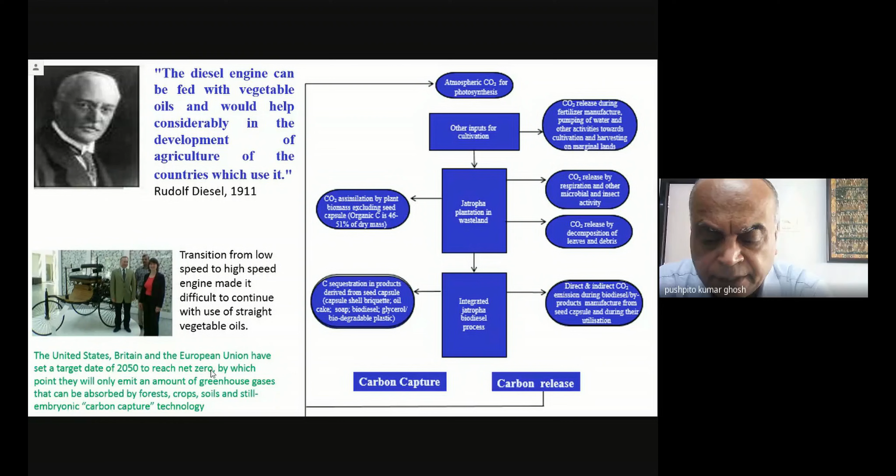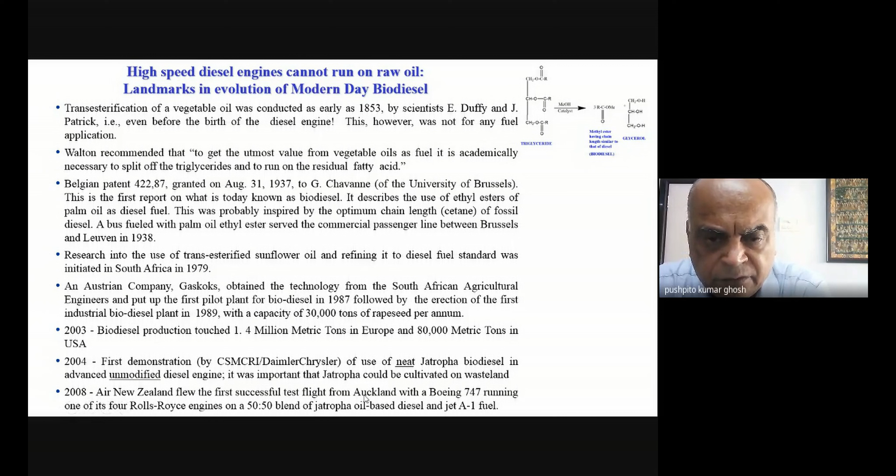Now, as I told you, the biggest interest was that we were trying to grow all kinds of potentially commercially important plants in very difficult to cultivate lands, what we call barren lands or wasteland.

This is what really attracted the attention of the world. In fact, I'll send you an article published in Nature by this person, effectively centered around all of this work.

Now, before I come to this - I've not taken the whole film, just a snippet from it. It was made by the German television channel ZDF. People from Germany had come and filmed this work of ours. I'll play it now, it's just about 2-3 minutes, and later on I'll describe some of these things.

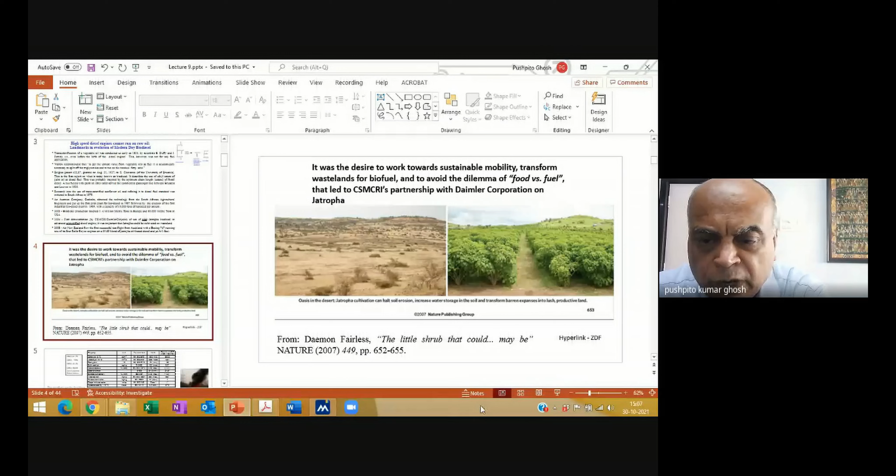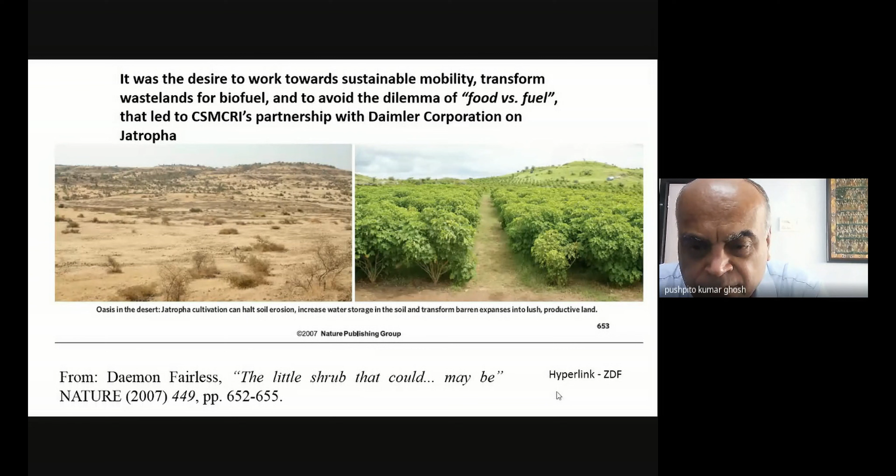You would have gotten some idea about how exactly this works. I wanted to cover all the way from how the plants look, how they grow, the fruits, the seeds, and how biodiesel is made, and how it was running a bus on 100% biodiesel - just so you can see the entire chain of how this is all done. Later on, I'll describe the individual steps in more detail. Is it clear to everyone? Are you able to see everything?

Now, I told you it runs on 100% biodiesel, but actually there was a very stringent specification for the fuel which we had to comply with, because until we achieved this, nobody would put it in their car. Mercedes would not put it in their cars unless we had been able to achieve this minimum specification. This is what the actual results were, and what was important was that in almost everything, not only did it match the specifications, but it far exceeded them.

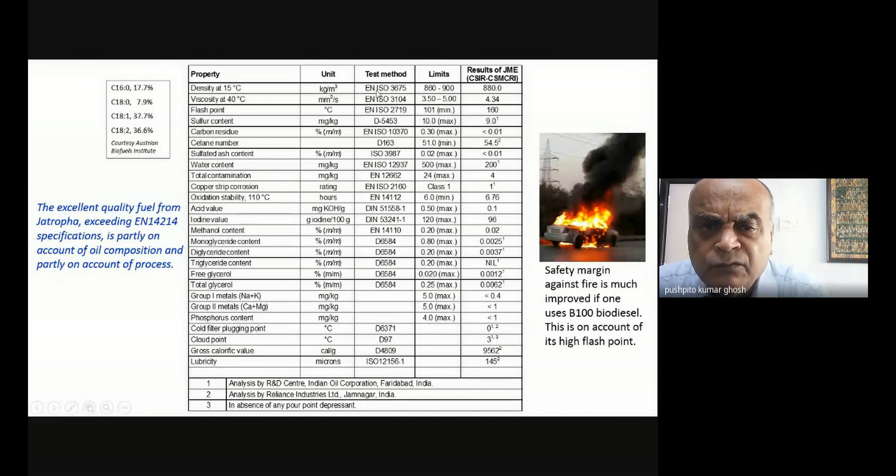It was because of that they had the confidence of trying this historic run with neat biodiesel without modifying the engine. Another interesting thing nobody talks about: this particular fuel has a flash point of about 160 degrees centigrade, so it cannot accidentally catch fire. In fact, when people were trying to get a license from the Petroleum and Fuels Act, they said it falls outside the Act because its flashpoint is so high. So this neat running showed that accidental fire would be almost negligible in this kind of situation.

All of this analysis, most of it except for a few, were generated in Germany by Mercedes-Benz. We did not have the capability of really generating any of this ourselves.

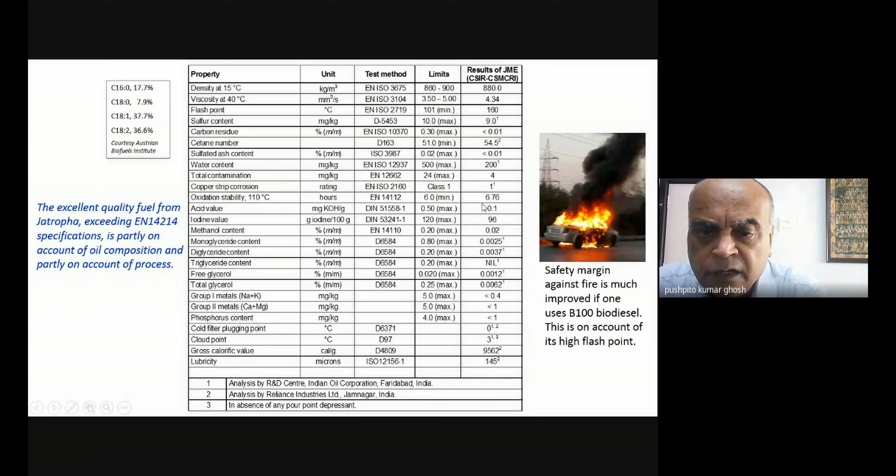Before this was put into a vehicle, a lot of test runs were done on test engines. That was done in Pune by Daimler Chrysler India and the Automobile Research Association of India, also in Pune. They tested both for fuel consumption in their engines, and also looked at all the emissions: CO, hydrocarbon, NOx, particulates, CO2 - all of this was actually looked at.

This methyl ester that I told you about, you can actually esterify using either a base catalysis or an acid catalysis. Both kinds were done, and both products actually passed the test - they were very good, no problem. But finally, the base catalysis was chosen because it was a bit simpler to carry out - it could be done at room temperature, and there were a few other advantages. So effectively, biodiesel based on this catalysis was selected.

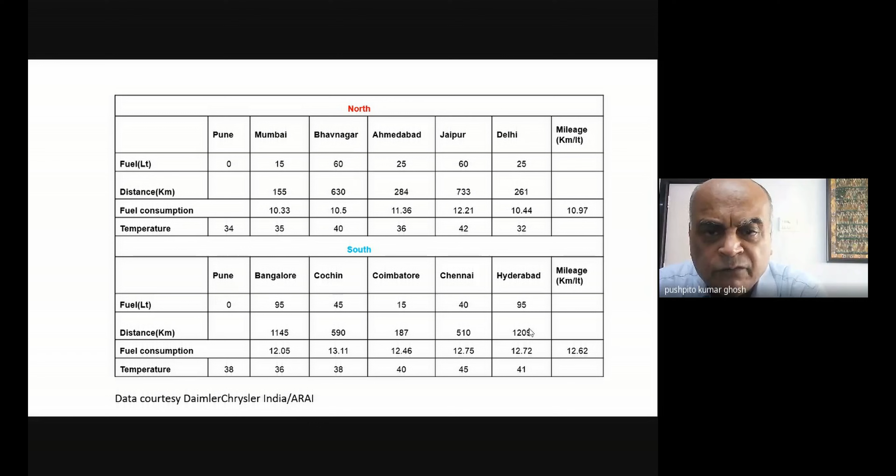They got even more daring, and the next year, 2005, they did something unbelievable - they went to Leh, the highest motorable road in the world, at something like 18,400 feet. They took three Mercedes-Benz cars to Leh, and I was also there. The vehicles, even in that rarefied atmosphere, actually ran well, and we have an understanding of why they ran so well.

All the emission data etc. was generated, and basically, I think at that time the specification of fuel was Euro 3, EU3. It far exceeded EU3 specifications.

Then I told you about Austria, because Austria had the best biodiesel institute in the world. The Austrians actually did another study where they compared this Jatropha biodiesel with biodiesel from Europe and other parts of the world, and effectively, it came out right on top.

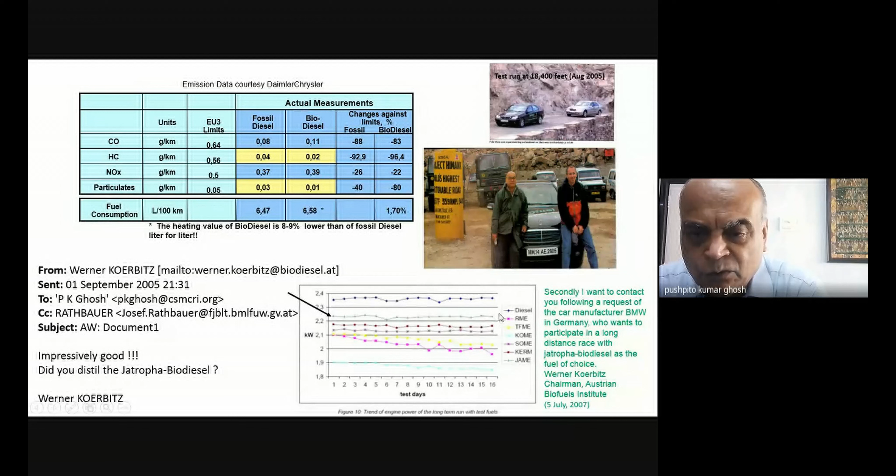It was from Paris to Dakar in Africa, 5,000 kilometers. I think it finally never happened, this race, but it was all set to run.

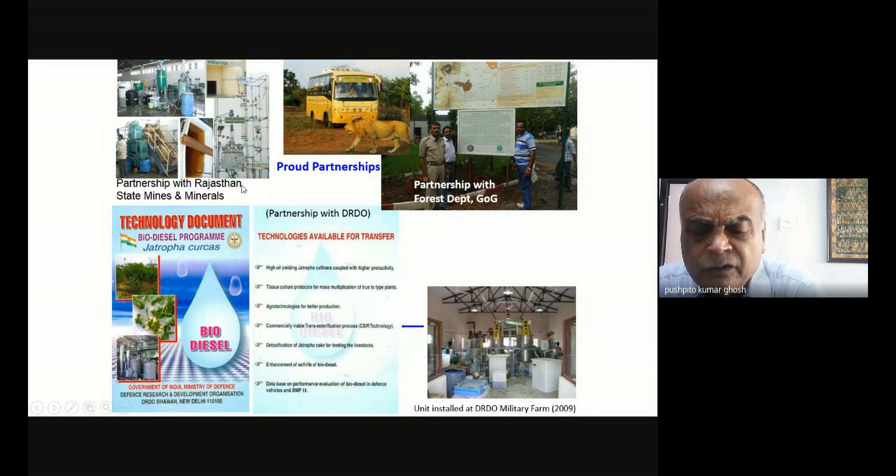Similarly, this is basically what was running all the vehicles in our country on biodiesel, starting from the buses in Gir Forest, DRDO, all the military vehicles—they had licensed the technology from us, and another company in Rajasthan State Mines and Minerals. So it became a very interesting technology.

In fact, there was this sheikh, the crown prince of one of the Emirates, Ras al-Khaimah. He came all the way to our institute because he had heard so much about it, and actually witnessed everything, how it works, and things like that.

So obviously this is all over the world—all these Mercedes-Benz cars running on this stuff and things. So what is important is...

It looks like a surprisingly simple technology. You can imagine there's an oil, and you need some methanol for the transesterification, and there's a base catalyst like KOH or some catalyst like that. Then you are forming the methyl ester. But it looks so simple, yet most people could not get it right. I'll tell you what were some of the complexities. Sometimes don't get fooled by these simple equations—when you actually go to do something, you'll realize how difficult a seemingly simple problem can be, such that the whole world is trying to do it and they can't.

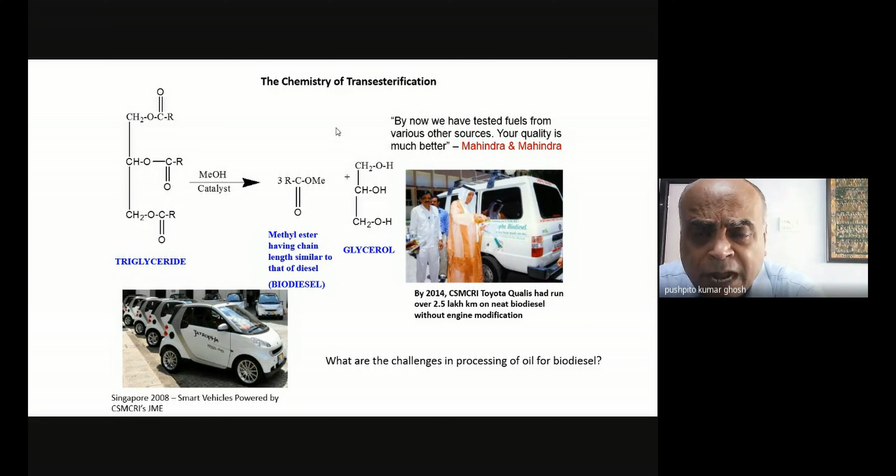Now, just to show you that biodiesel, if we could actually grow and run vehicles on it, would be unbelievable. This vehicle's engine was opened up after about 163,000 kilometers of running on 100% biodiesel.

These Toyota mechanics were absolutely amazed because the engine looked almost like new. Finally, of course, it covered about 2.5 lakh kilometers—I think at that point the car became too old, but the engine was almost like new.

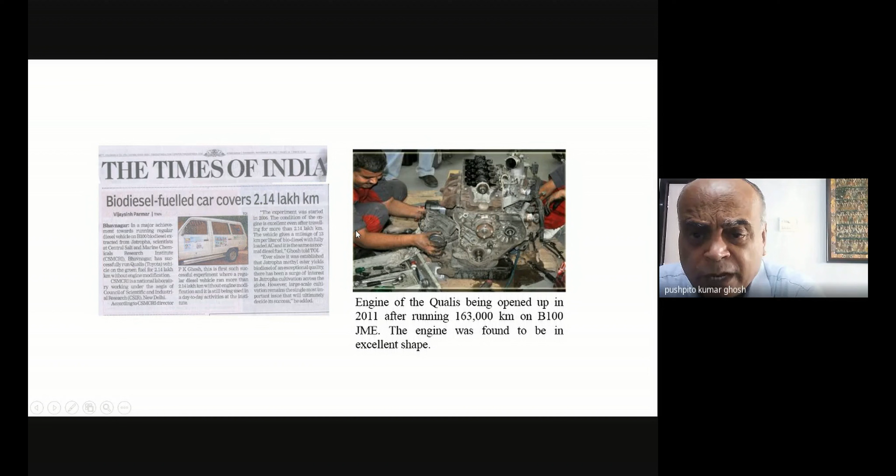Now, it's not just about running vehicles—you can run stationary engines also with this. In fact, at one time, all these stationary engines from our country were getting exported a lot on the back of this performance. It was an outstanding performance, and you could even run very big vehicles like earth moving equipment. Everything worked fine.

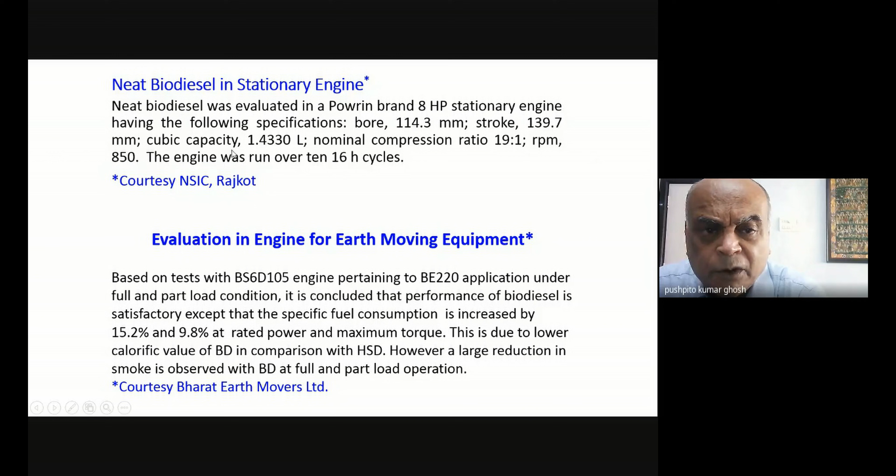So obviously, all of this—I'm not sure about this, but all of this was 100% biodiesel. Now, it's not only that one was using Jatropha oil.

Because that's also good, since if you keep frying in the same oil, it's not good for your health. So if you have a good outlet, you use it for frying as long as you want, so that the oil doesn't get too bad—and after that, just convert it into biodiesel.

So this could be a huge resource. They were of course not very sure about how much waste oil they have, so they wrote that we don't generate much waste oil and will work with our suppliers of oil to determine their wastage—if quantities are interesting, we will champion implementation. So obviously, this is something that had captivated people across the board.

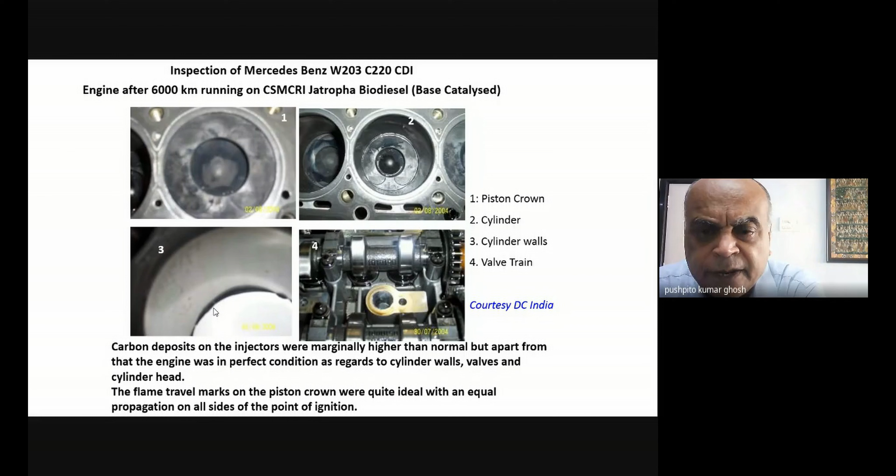Then the oil you got from that - a bit of the method of manufacturing biodiesel was shown, but I'll tell you more details. And then the cake you get from the oil after pressing is an excellent manure, so you can just put it back into the field. Ideally, one should do this part of the operation within the field itself - maybe 300 to 500 hectares of cultivation, and around there you put up one oil mill, so you're not transporting things over long distances.

Also, it was found that when you keep the seeds stored inside the capsule - meaning you don't take them out until you're actually ready to use them - the oil has much less free fatty acid, and it's a much better quality oil.

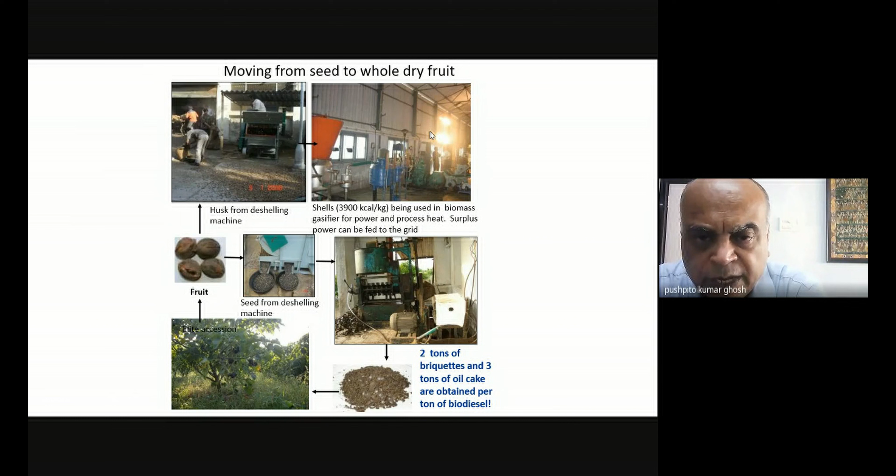Now, the cake I showed you has been used not just for Jatropha but for many other crops, and it grows very well. These are trials on cotton and bajra, done by professional people at very large scale - not very small scale experiments.

Now let me come to the making of the biodiesel. So you saw how the oil was expelled from the seed. Now, some very important things - any oil will have some amount of free fatty acid, and this is very detrimental in biodiesel. Secondly, if these are present in the final biodiesel and you can't remove it, it can really cause havoc in the engine.

In the actual oil you get, here it's 2.6%, but when we finally look at the free fatty acid in the biodiesel, it's just about 0.29% - so almost 90% of it has got removed. That's the first thing one needs to do. One thing I should have mentioned - there are two reasons why the Jatropha biodiesel particularly worked so well. One is that we had a very good technology which we had developed, which I'll describe to you now.

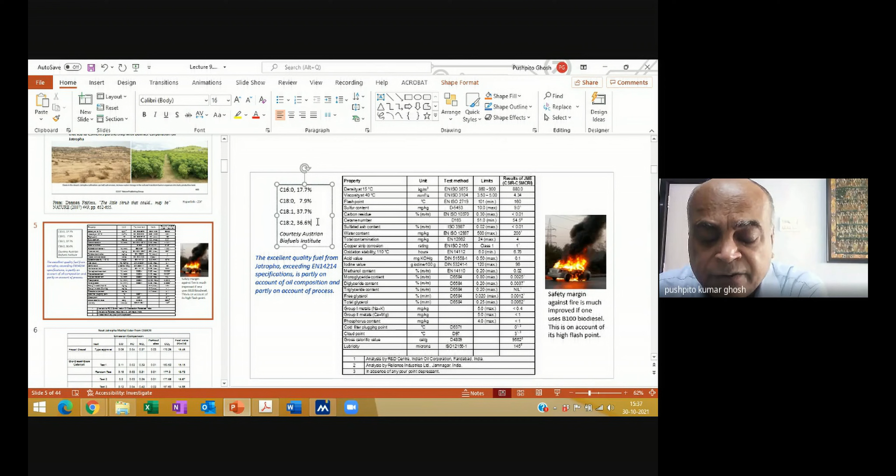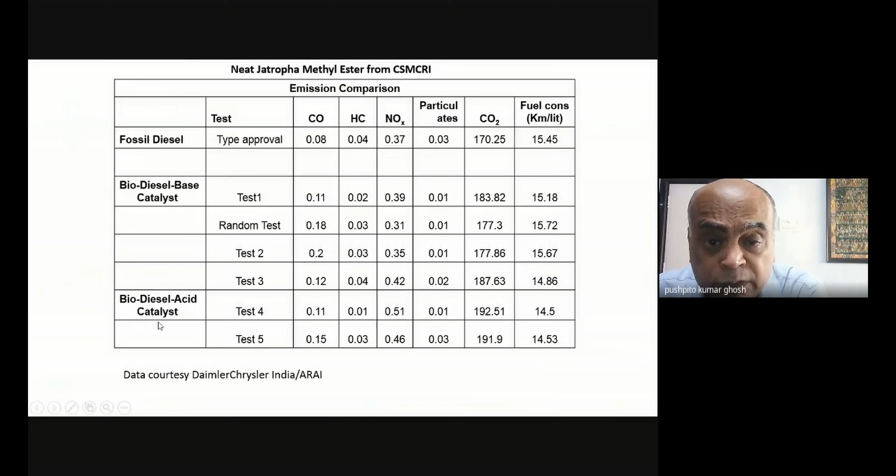Second, Jatropha oil is one of the very few oils which does not have any phospholipids. Phospholipids are very detrimental to the engine. There's a specification for phosphorus content, which should be less than 4, and in our case it was less than 1. The reason is because the Jatropha oil did not have any phosphorus, so this was another very important thing. Sometimes what looks like a problem can actually be a good thing.

Like used cooking oil. When people make cooking oil, one of the refining steps is that you remove phospholipids from the oil in making any of these cooking oils. So it's not there. To that extent, the Jatropha oil and this used cooking oil had certain things which were common. Bear that in mind.

So selecting the right kind of oil is also important. Although we have made it with many different types of oil, you just need slightly better refining methods for the oil before you actually make the biodiesel. But that refining is almost negligible in the case of Jatropha biodiesel.

So first thing, as I told you, you've got the oil, and even though this free fatty acid amount is not so high, you still need to get rid of it. So what was done?

By the way, all of this is patented. This entire thing, and this is the patent that has been granted to us. So this is all covered by granted patents. This is all part of the inventions which went into actually making this product.

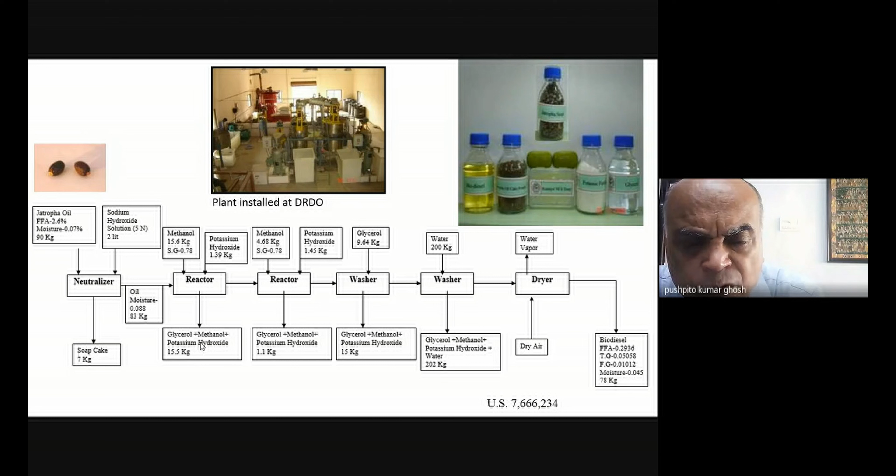So how would you get rid of it? What would you do if you suppose you had KOH, methanol, etc. present in your biodiesel? What would you do to purify? Some adsorbent, sir. Adsorbent - that's a good idea.

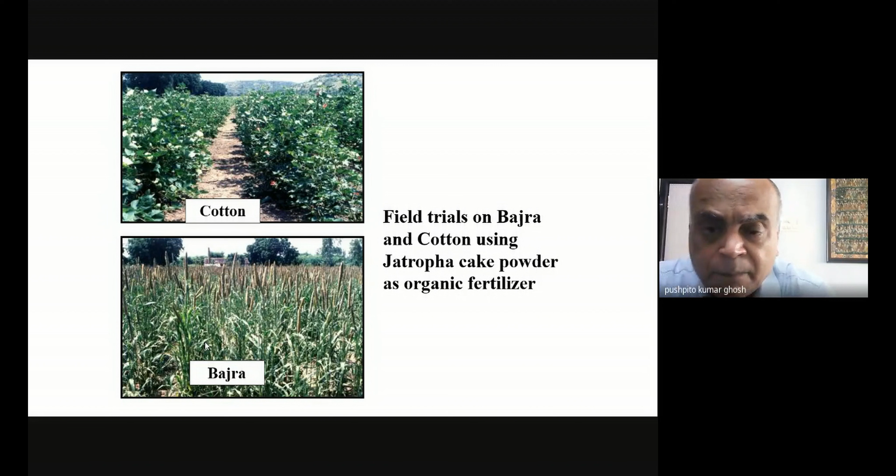Now, one of the other things - let me tell you that you have to make sure there is absolutely no particulate matter in your biodiesel. Sometimes when you are using adsorbents, because of attrition, some amount of these particulate matters, and sometimes very fine material, can go into your biodiesel. But it's a good idea - I think you've given one example.

Let's put it down: how can you clean up the crude biodiesel? Okay, this is the question. A student suggests: use adsorbents.

That's one, but remember there are many different kinds of impurities, so you'll have to have an adsorbent which can deal with all of those. Just keep that in mind. But it's not a bad idea. Anything else? Just the simplest thing that you can possibly do.

Can you put water for washing? I'm just saying because you have got KOH, methanol, etc. They're all soluble in water. So do you think we can put water for washing? Maybe, sir, but there might be a chance of emulsification too.

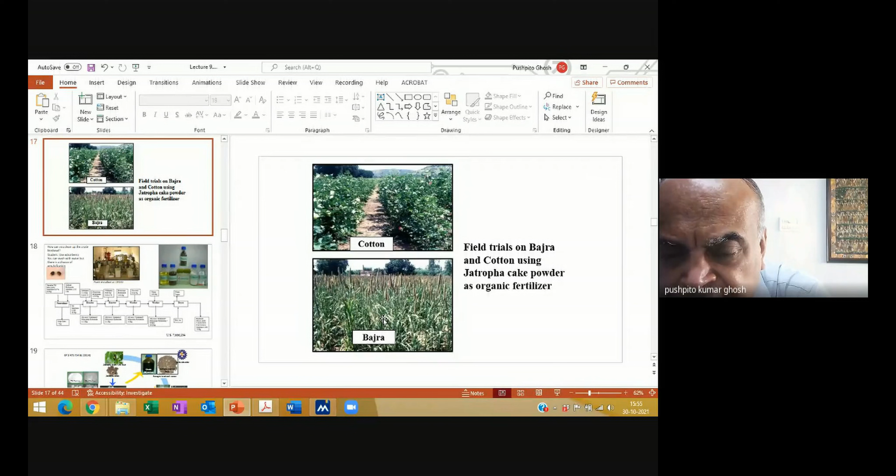By freezing it, maybe, sir. By freezing or drying, sir, or heating. Heating means heat and apply a vacuum or something. No, sir, not exactly heating, sir. Like dry air or something, sir. Very good.

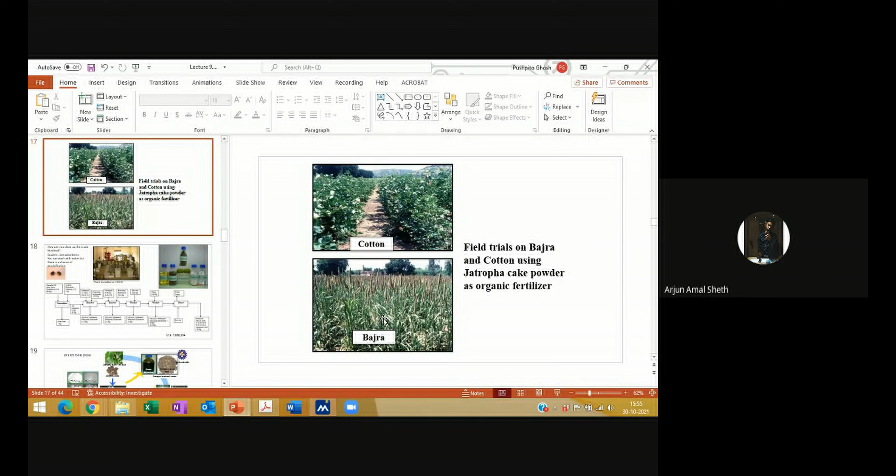In fact, in that film you would have seen, towards the end, there was biodiesel in a trough, and there was a lot of air being sparged through it, and that was really to get rid of the moisture.

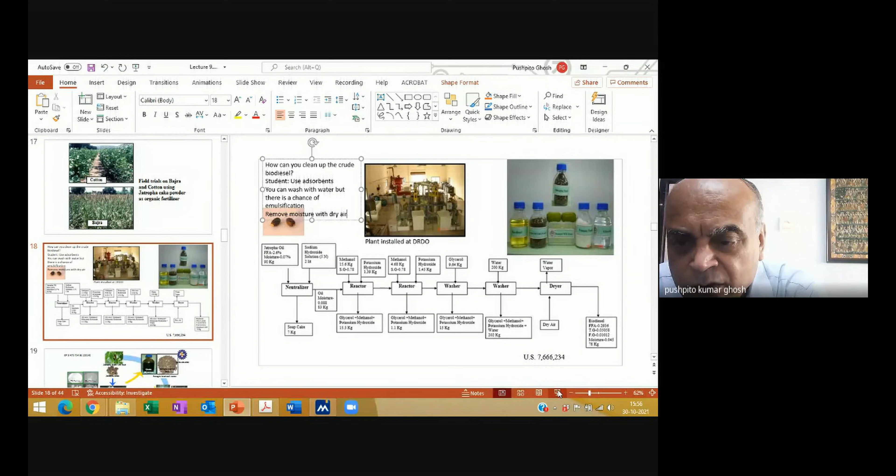And you can do it with biodiesel, but you won't be able to do that with gasoline, simply because gasoline has such a low boiling point. But biodiesel has a very high boiling point, something like 300 degrees centigrade. So it's very simple to sparge dry air, and you just carry all the moisture with it. That's what it says here - dry air, and you take out the water vapor with that.

You can see the moisture content - it's about 450 ppm, which was within the specification. And you'll also see that starting from around 83 kg of the oil, after you have removed the free fatty acid, you get about 78 kg of the final product. So you are talking about very high - in fact this was slightly lower, but typically comfortably about 95% conversion. You can get 95 to maybe 97%, is what you can get.

And now, when you get this stuff, over here I showed you how you get soap cake. Now you can neutralize the alkali with, let's say, sulfuric acid. Firstly, what you do is a vacuum distillation of this layer and pull out the methanol, which you can recycle. It's because the volume is very less.

So you can take out the methanol, and then what you can do is add sulfuric acid, not necessarily a solution - you can even add concentrated sulfuric acid, and it will form potassium sulfate, which is a wonderful fertilizer.

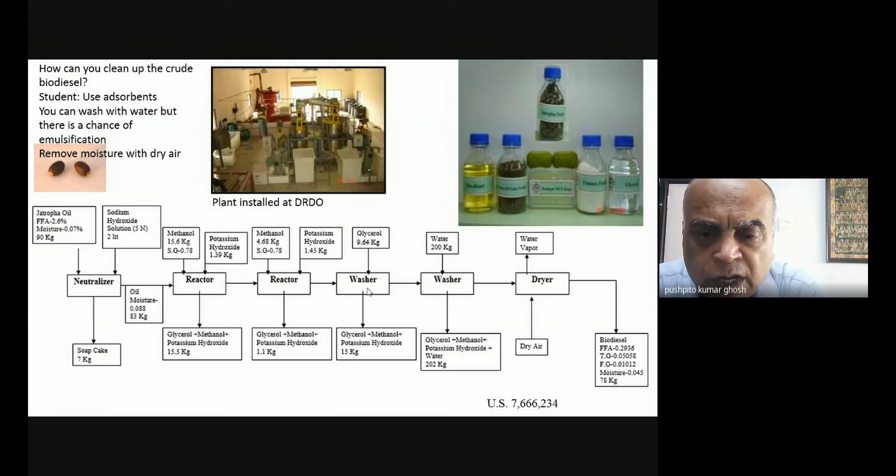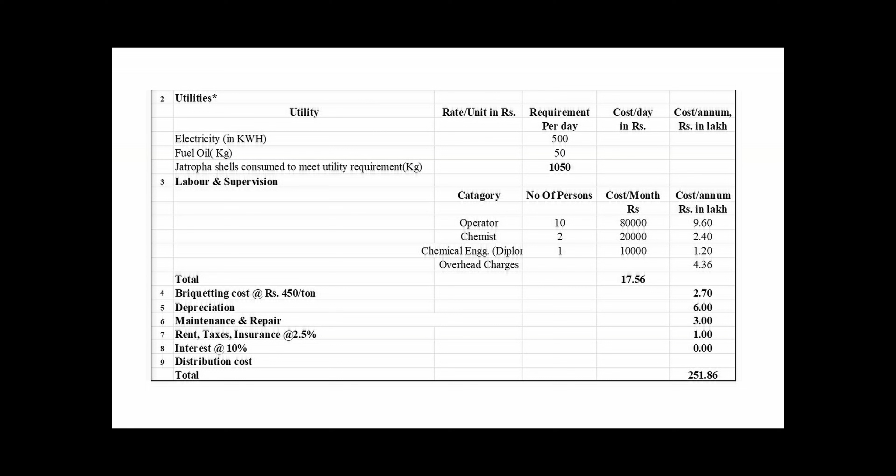What was the cost for the Jatropha biodiesel, sir? I can tell you that at that point in time, it was around 65 rupees per liter. And at that time, the cost of diesel was around 48 rupees per liter.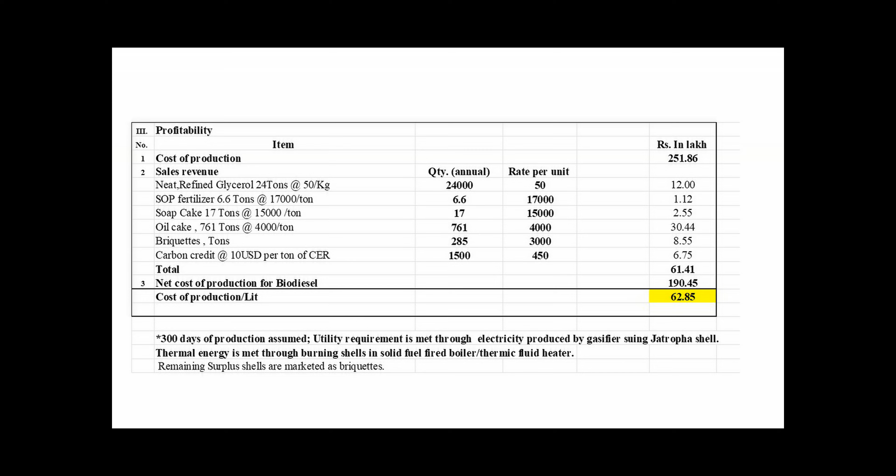So now, this is what was done with the crude glycerine. See, it looks like this horrible stuff. Basically what we succeeded in doing is converting it into bioplastic.

The particular microbes that we required for this - Dr. Sandhya Mishra, who's a microbiologist, when I asked her to look for this possibility, she searched all over and was able to find ideal microbes, some marine bacteria, which she found from the Arabian Sea. That's what was used for producing this bioplastic.

And it was a big enough invention that it won the CPET National Award. The country became famous, not just for making biodiesel, but India develops plastics from the Jatropha plant. So every bit of the fruit was completely utilized in making useful products.

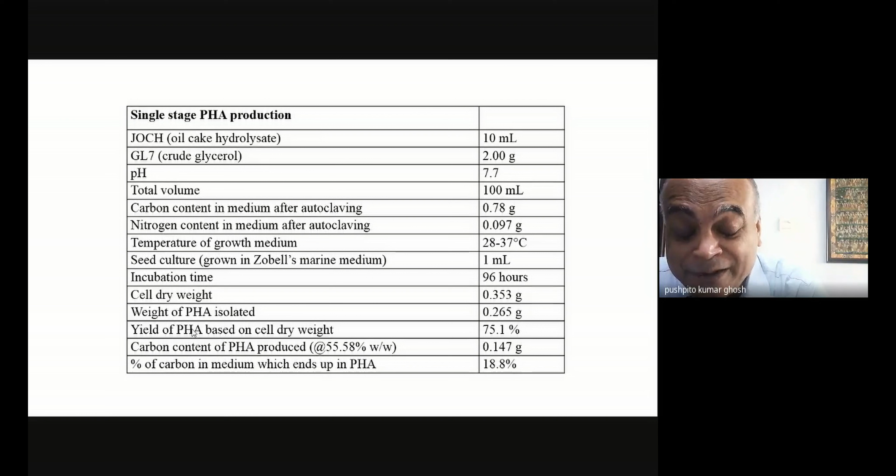All the parameters are given here, but one of the very important ones is that 75% of the cell weight of that bacteria was the plastic. That was very impressive - that the bacteria produced so much and accumulated so much of this in its cell. One of the problems is, of course, that you have to then destroy the bacteria to take out the plastic. I wish there was a better technology to do that.

Anyway, these are some of the indicators and parameters which you might want to look at. Is it clear? You understood, no?

What all do we take? We take the crude glycerol. We also take the hydrolysate because we need a protein source, a nitrogen source, so that comes from the oil cake. We hydrolyze it, we control the pH, and a little bit of some medium has to be introduced. The incubation time is quite long, 96 hours. And overall roughly about 20% of the total carbon which was there in the oil cake and crude glycerol ended up as plastic.

So it's not 100%. Of course, in any case, 50% will go by respiration, but it's not a 100% conversion.

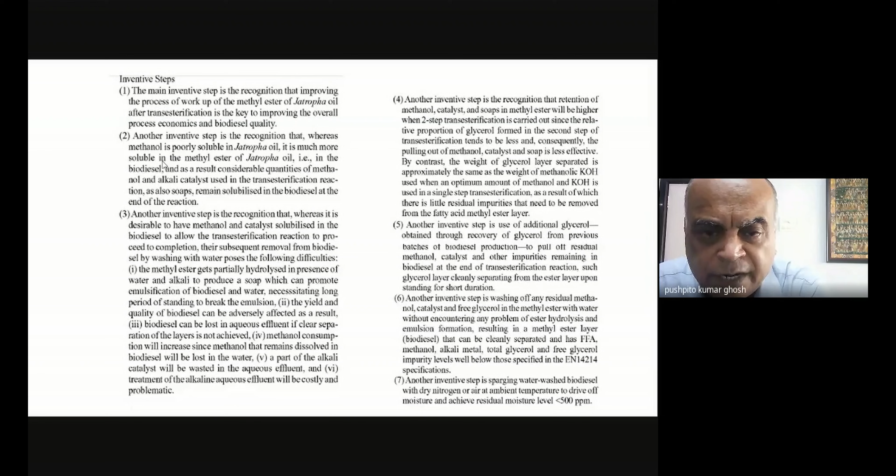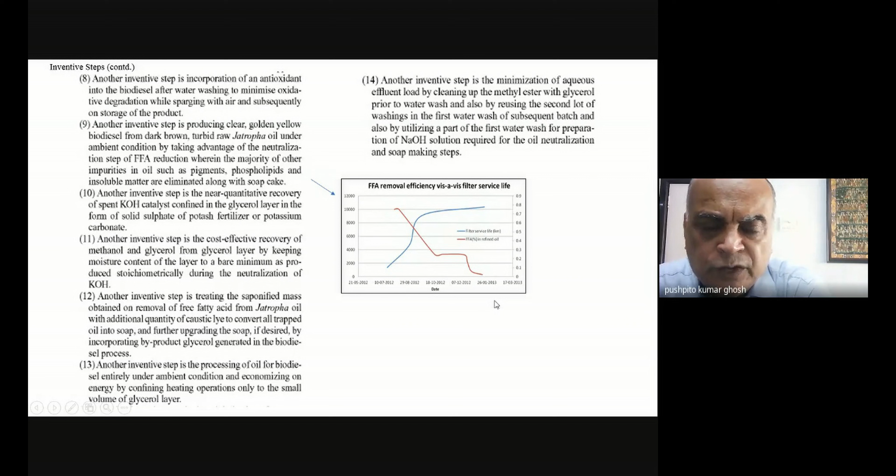One of the things that was so important was this neutralization, to remove the phospholipids and free fatty acid right in the beginning, before starting the transesterification. A very detailed study was done subsequently, and we could correlate how well we do this step with how frequently we need to change the oil filter. It was just incredible - when we could correlate it exactly with the free fatty acid content, we knew this is all the reasons why those vehicles etc. were running so nicely.

I'll go through this - I'll not go through it. Now, up till now, I've only told you about downstream, which is how to make biodiesel from the oil, or from the seed.

But the biggest challenge, and the reason why India has not made that much headway, is that we did not really succeed. Maybe a few people did, but the majority did not apply their mind on the agriculture part, of how to raise the crop. And that's very important. Secondly, because the crop, the focus was to raise it on wasteland.

It's not so easy to raise something on wasteland, barren land. Okay, but that was set as the success criteria. If you can do it, well and good.

Now, before I go to that, let me tell you why this work was taken up in the first place. Because the institute where I was the director, one of the things this institute was trying to do was grow important crops in the most difficult places.

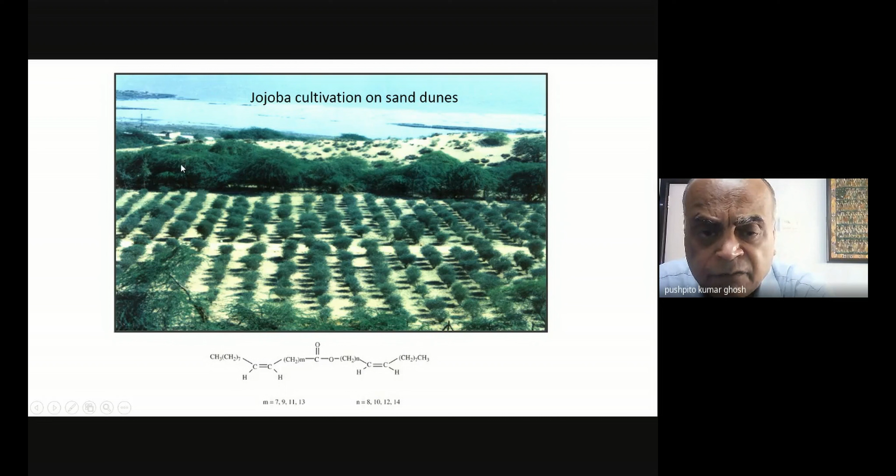If some of you use these fancy creams, you'll find they contain jojoba oil. This plant grows in the desert, and this is all sand dune that you see. These plants are actually growing in the sand dune, and it gives an oil which is extremely good for the skin. It's also a very good lubricant, and that's the reason all these personal care products now have started having jojoba oil. This was introduced in our country by some of my colleagues in the 60s and 70s.

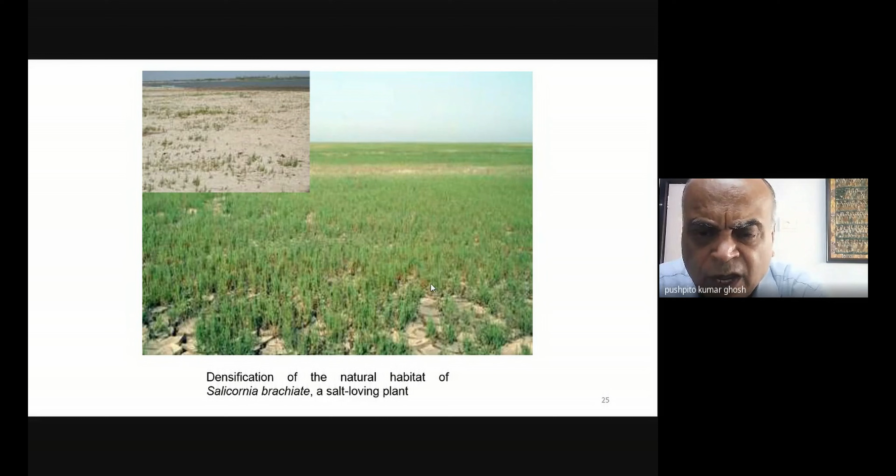So it is because of this that one of the committees of the United Nations had asked us whether we could look at the possibility of growing Jatropha plants on wasteland. Okay, and that's the origin, because of all this work that was done and the kind of thinking that the United Nations Environmental Program had. I'm talking about around 95, 96, and without that, we would never have been able to take up this kind of project.

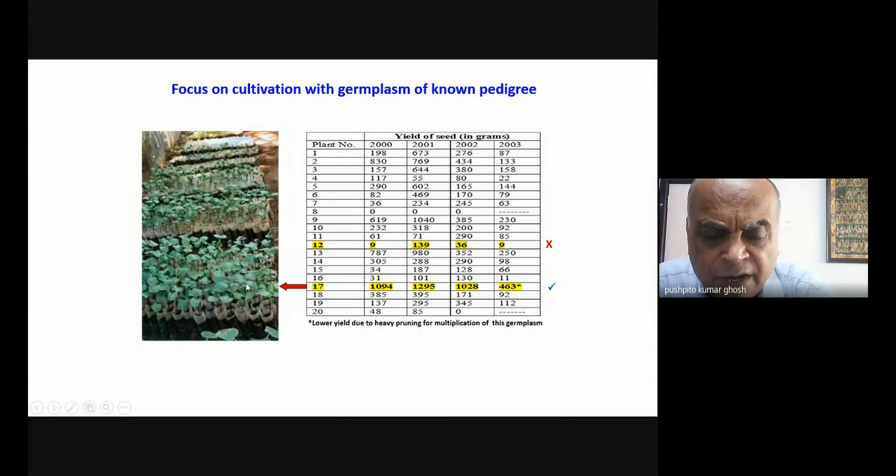So under that, then what my colleagues did is they searched all over India, looking for plants which are quite productive, where you see good fruits of Jatropha. They identified some plants like that, where the seed yield was quite good, and then they developed technologies, initially tissue culture and later vegetative cuttings, and from those maybe 4 or 5 plants, they raised hundreds of hectares of these plantations from those cuttings.

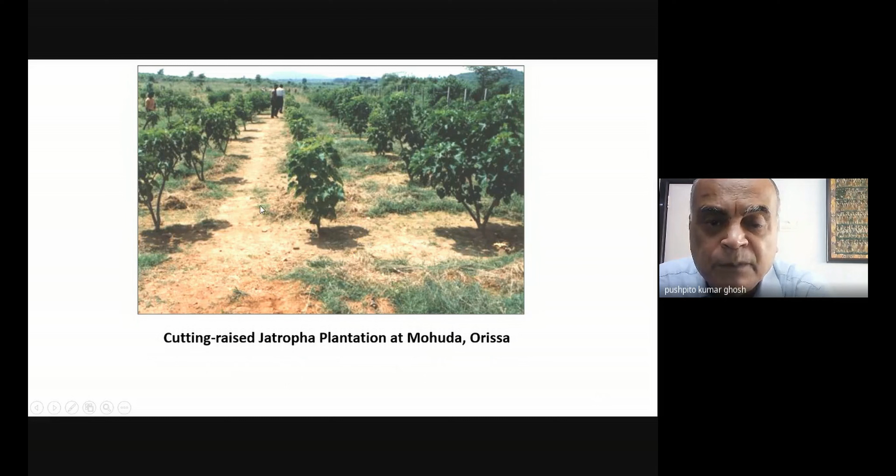So they were like quality germplasm, right? And this is what gave us good productivity. You can see, if you have a really productive plant, how nicely fruit-bearing they are. And the point is that only 1 or 2 plants can be like that - all your plants need to be productive like this.

So although I showed you about biodiesel and all, let me tell you, 85% of the effort was in agriculture, in plant biology, all that kind of activity. And so that's how the best germplasm was identified.

And even while growing them on wasteland, when we compared with typical yields of oilseed crops - things like maize, brassica, others - we were not doing so badly. It was not too bad. These yields of 1,300 kilograms per hectare actually compared reasonably with some of this. So it is possible, if you apply your mind properly, to grow these things.

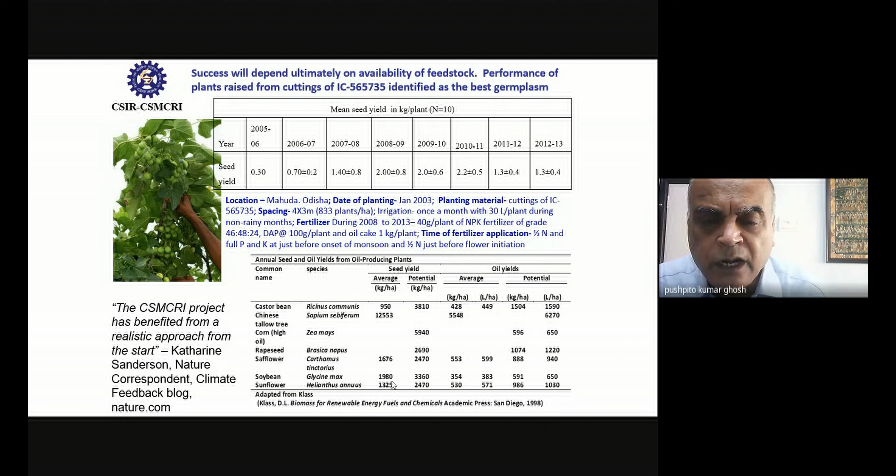Now, after all that, another thing you must keep in mind whenever you're working on biofuels is you must do a carbon or energy balance. How much energy are you investing in whatever you're doing? For example, you might be requiring heat somewhere, pumps, fertilizer - all of those things consume energy, because finally what are you trying to make? You're again trying to make a fuel which gives you energy. Of course, maybe it's a fuel for a more fancy application like driving a car, but nonetheless, it is an energy fuel. So this is the way one looks at it.

What you do is start looking - and I can share this with you. I don't know if I've got it, if I've got the Excel sheet, maybe I'll share it with you. So you have to start looking at what are all the inputs and what are the outputs.

So in our case, what were the outputs? Well, we got those fruits, then we removed the seed and the shell. I told you that we took the sludge and the shell and made briquettes out of it. We knew the calorific value of those briquettes, and how much briquette we could produce from whatever tons of biomass we had. So we worked out the energy output from briquettes.

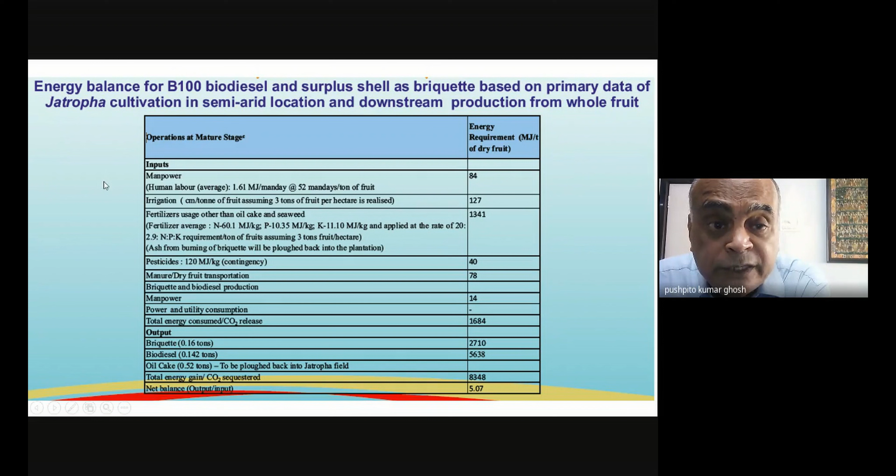Okay, now on this side, what all do I require? We had to work out how much manpower we required. There are calculations for how much energy is equivalent to manpower, so from that we had to put how many megajoules of energy was being expended by human labor. We did irrigation, so we were operating pumps somewhere, or maybe a few other things I don't remember, but we had to put that in.

You need fertilizer. So what are the fertilizers required and how much? And to produce those fertilizers, how much energy was consumed? Like how much energy was consumed in making urea, how much energy was consumed in making diammonium phosphate? Things like that. So you put that in.

Pesticides—did you have to apply pesticides, and then how much energy was required? There were transportation related costs because you have to move things, so you add it up. How much power did we consume? Some of the power was actually derived from our products itself, so we did not require any external power.

But then you add it up, and you can see it's 1684 megajoules per ton of fruit, and this is the total energy input versus your two products, briquette and biodiesel.

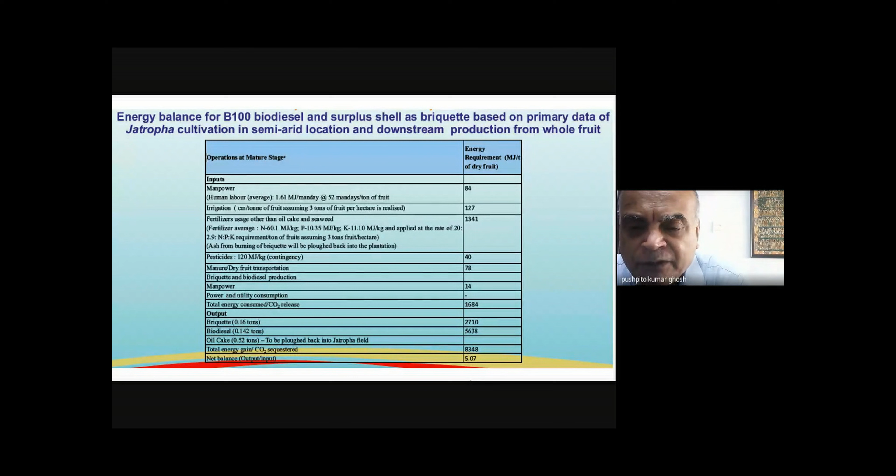Yes sir. And by the way, this is the kind of life cycle analysis which you need to do. That is, you cannot just start with your plantation and say, assume that I've bought fertilizer and all. You'll have to figure out where that fertilizer came from, how much energy did it require, and look at the whole thing, and then only you can say whether you will have a positive balance or not. And the balance is very simple: the energy output divided by the energy input. That's it.

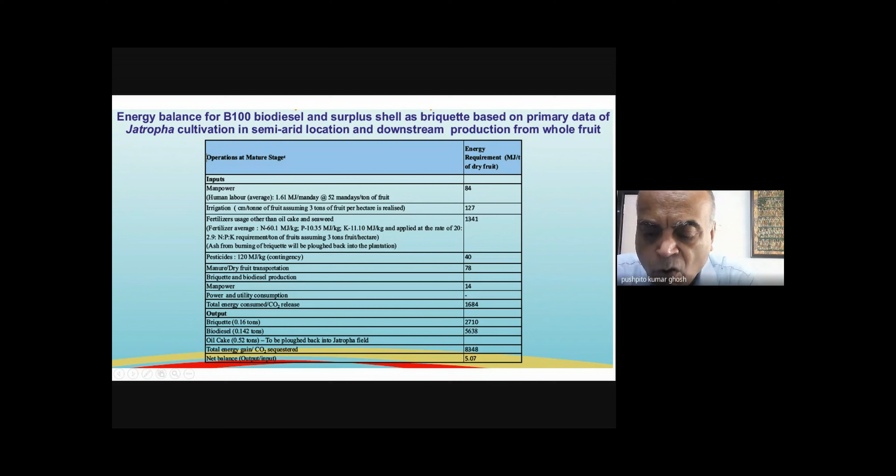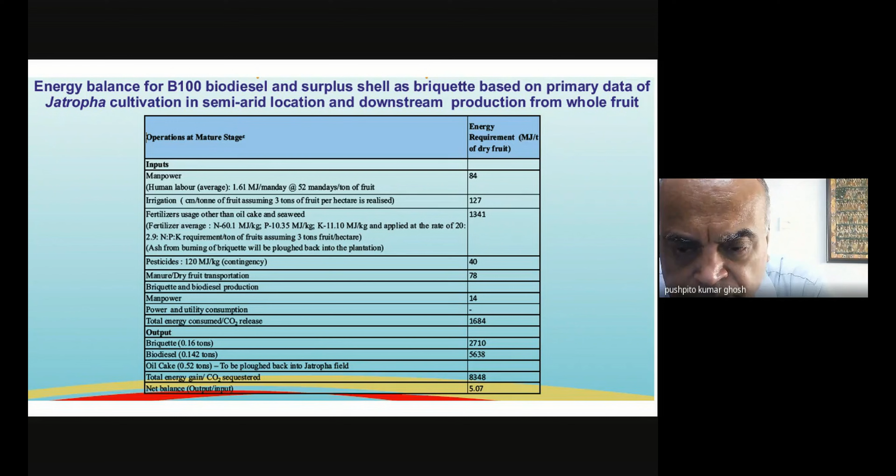Okay, all clear? All clear? Yes sir. All clear? Yes sir. Okay.

Now, in fact, this is another thing—when you are working on biofuels, or for that matter anything, after this we'll be talking about solar energy, and the same thing will apply there. Never put all your eggs in one basket. Don't be so obsessed with ethanol or biogas. You say, yeah, everything is required—I need biogas, I need ethanol, I need biodiesel.

And likewise, biomass—just imagine if your sole focus is sugarcane. In fact, at this moment while I'm talking, my entire team is in a biorefinery where they're demonstrating a technology. But I was just thinking, if all our focus was only on sugarcane, what a stupid thing that would be. So you must all, like I showed you, see how one could actually cultivate seaweeds, and those could give you ethanol. And then, of course, you have lignocellulosic biomass, rotten crops, etc.

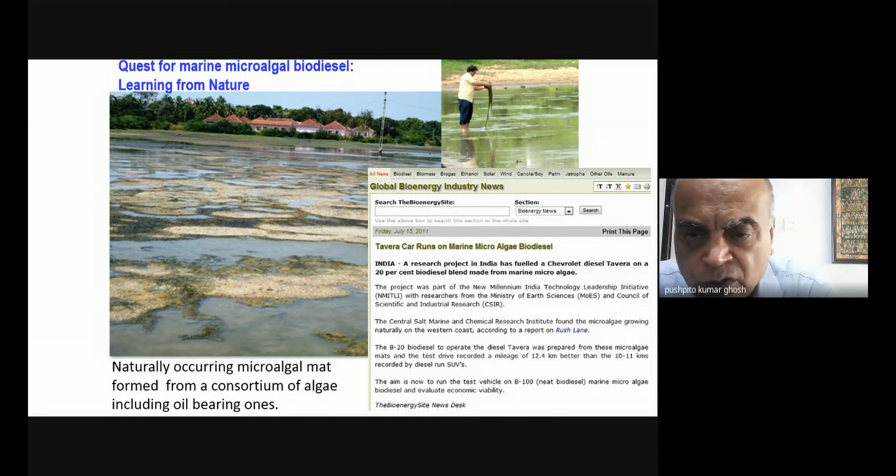Most algae don't have oil, but some do. This particular two microalgae that she got had about 12% oil, roughly. It's not a huge amount. Jatropha seeds have about 35% oil. Something like groundnut has got about 60% oil. So compared to that, 12% oil is nothing.

But still, it was important because it would be another source. This is one example where you may have seen things like this, or if not, go looking for them next time you go somewhere, like in the waters. This was somewhere on a coastal area, I think in Diu or some place like that. You have this kind of algae which form mats. It's amazing, you can literally lift off that mat. You can see this guy lifting the mat from the water, and then you basically try and extract the oil from this mat.

That was one approach, and the other was actually growing it in a relatively controlled manner. It's the second one which became more popular. Just like I showed you for Jatropha biodiesel, this is the first experiment in the world where a car was run on marine microalgal biodiesel.

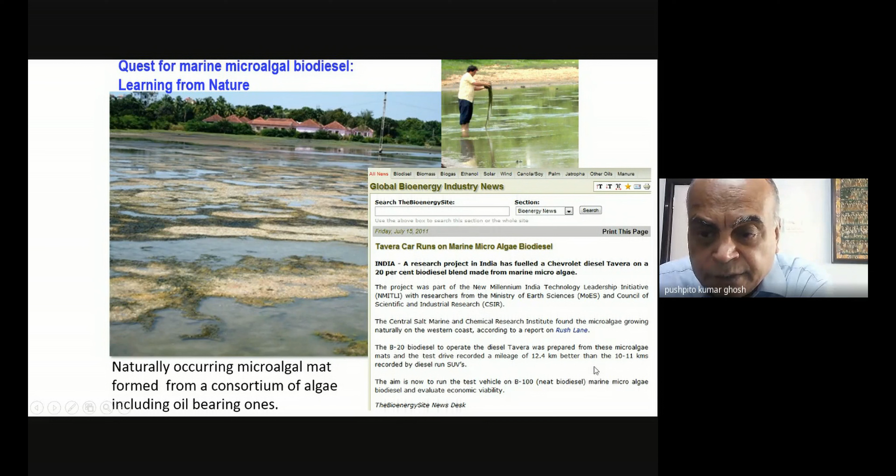This is all data, all these reports are international reports, not our reports. In fact, the former chief minister of Maharashtra, Mr. Vilasrao Deshmukh, you can see him pouring the microalgal biodiesel into this car. It was a Tavera, General Motors car, because we were working with General Motors at the time.

One way was you grow those mats. The other is that, like in Vadala, you'll find quite a bit of salt is produced, grown in salt pans. So you can bring in seawater into those pans, inoculate with your microbes, which can grow. They're raised with seawater, and finally, when the microalgae have grown sufficiently under certain temperature conditions, they tend to settle at the bottom.

This particular algae was chlorella. Chlorella is very well known, but there are hundreds of varieties, and what Dr. Sandhya Mishra found was the one which had the highest oil content. Let me tell you that there were something like 14 laboratories all across India at one time involved in this kind of project.

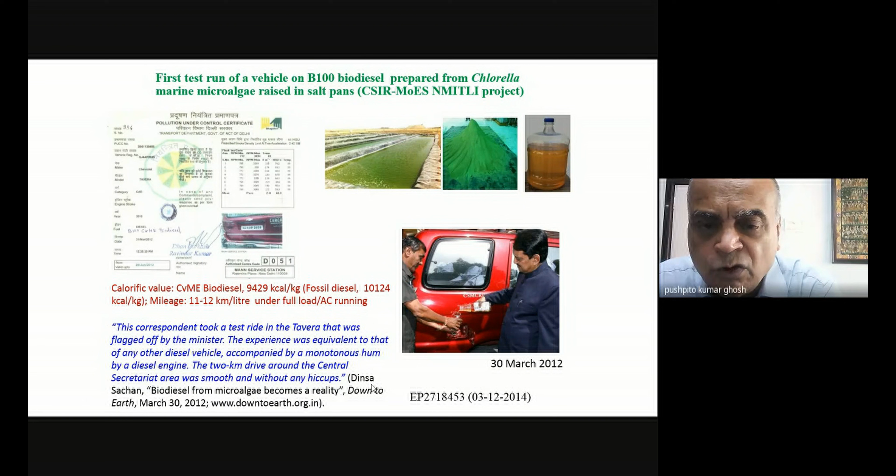So when you are making a product, make sure that you are making a product which is worthy of actually being fed into an engine or whatever. Otherwise, if you go and spoil the car engine, nobody will look at you the second time. So always err on the side of safety. Be very, very cautious. Test it out. Be 100% sure that you have got everything right, and only then go and do these kinds of things.

So I told you about the oil. You can see, typically the chlorella gave about 11 to 11.5% oil, maybe we didn't recover all of it.

Recovery was about 70-80%. So probably it had about 14-15% oil, and this is the amount that we could extract out.

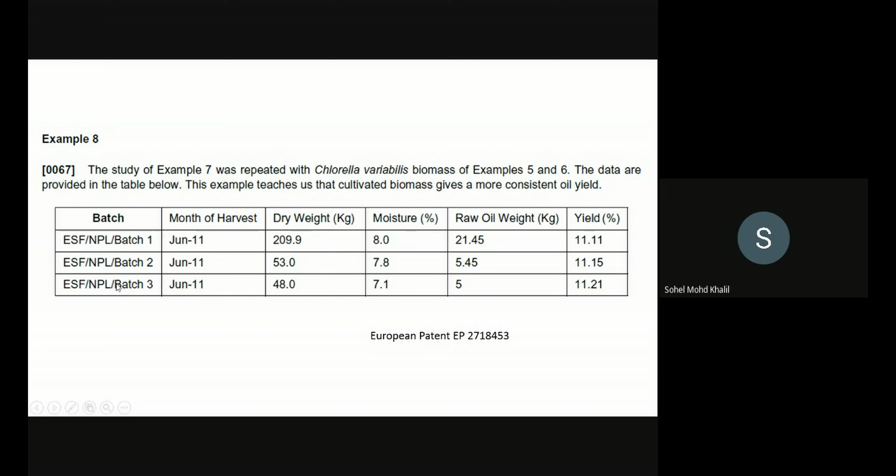The other very important thing to remember is that oil fuel is always a very cheap thing, it doesn't cost like gold. So just like in the Jatropha case, everything was converted into a useful product. Here too, after you take out the oil, the rest of the microalgae biomass, you can recover all kinds of things from it - amino acids, and more. So always make sure you are making the best use of your biomass, because biomass is very precious.

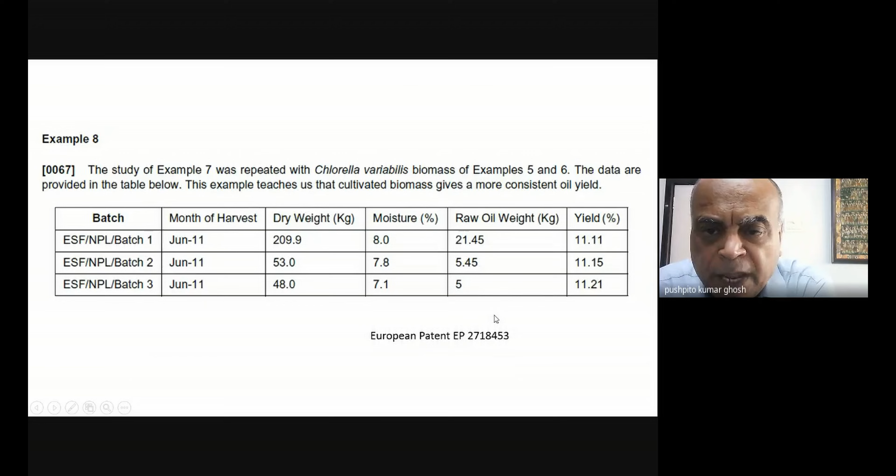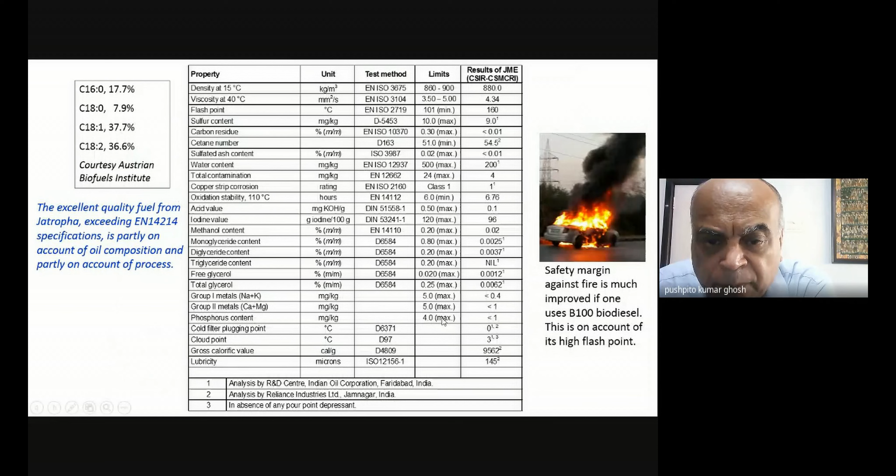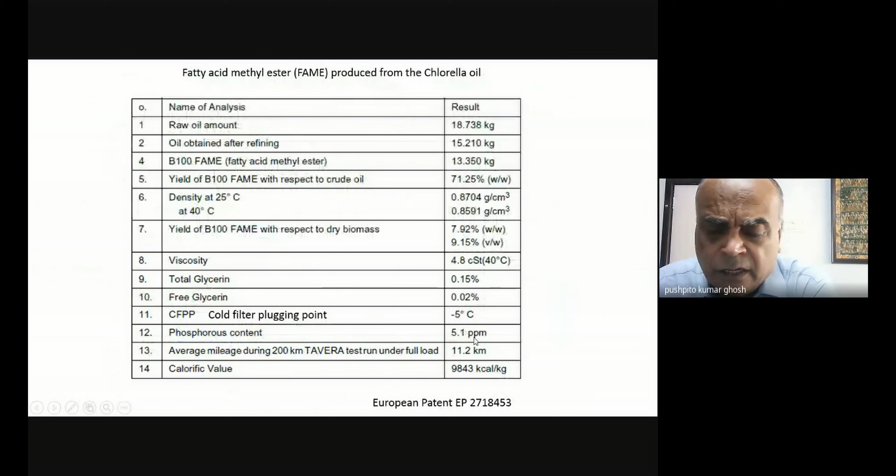Just like in the case of Jatropha, this is the analysis of the biodiesel from chlorella oil. More or less comparable properties, except that the phosphorus content was quite high. That's why it's so important to know all this. I'm noticing just now that this was marginally higher than the 4 ppm max for phosphorus content. So to that extent there was a marginal deviation which I noticed just now, but it didn't seem to make much of a difference.

Now I will also pass on, especially I prepared this for the mechanical engineers, because you all will be more interested in the engine end - I will send you this paper, published in Energy Conversion and Management, where

regular diesel, Jatropha biodiesel, and microalgal biodiesel were compared under different modes of operation of a standard engine - urban mode, rural mode, motorway mode - and effectively the conclusion was that their performances were quite comparable. Downstream, there is no issue if you want to make biodiesel - absolutely no problem. Upstream is the problem. Raising those millions of tons of biomass has turned out to be a far more difficult problem than one imagines.

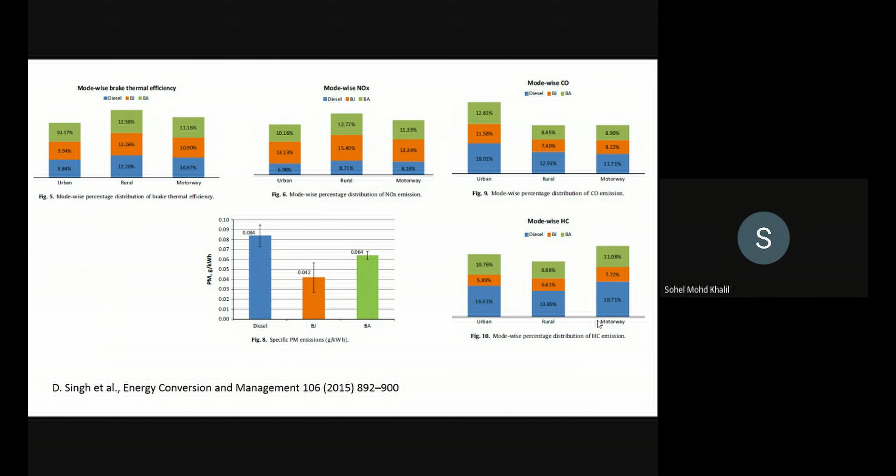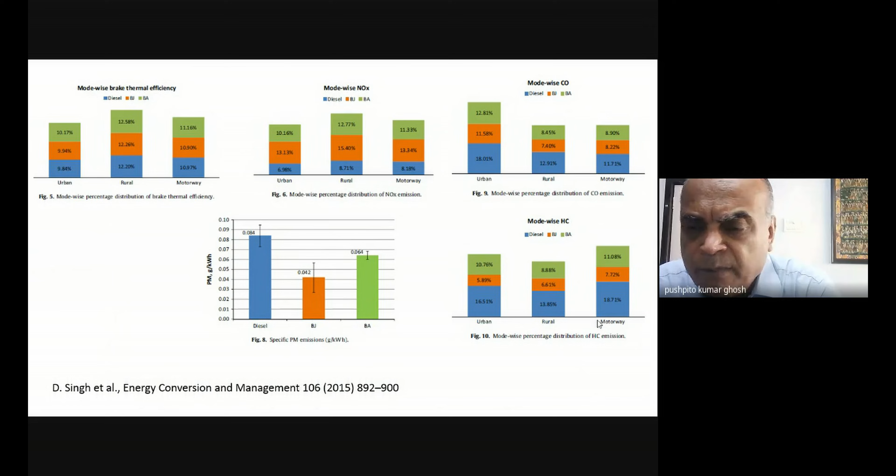This is what, if some of you are working, especially those into life sciences, you might want to look at - where are there opportunities to grow these things? Maybe on hilltops or wherever. I told you that you can also use the vegetable oil for running aeroplanes, and now

this kind of biodiesel is different from whatever I showed you. What I showed you was the methyl esters or ethyl esters. Now, one of the things is that those kinds of esters have a cloud point around maybe -2 degrees centigrade. After that, working with companies like Balmer Lawrie, we were able to reduce that to something like

-8 degrees centigrade or so. So up to about -8 degrees centigrade you might be able to manage with that kind of methyl ester, but when you are working with an aeroplane at that height, 40,000 feet, where the temperature is minus 40 degrees centigrade, that fuel will become like a solid. So those methyl esters will not work in these kinds of applications. Of course there are so many applications like trucks and so on where the bulk you can do with normal methyl esters, but if someone says I want to run an aeroplane, then you have to start looking at a different approach.

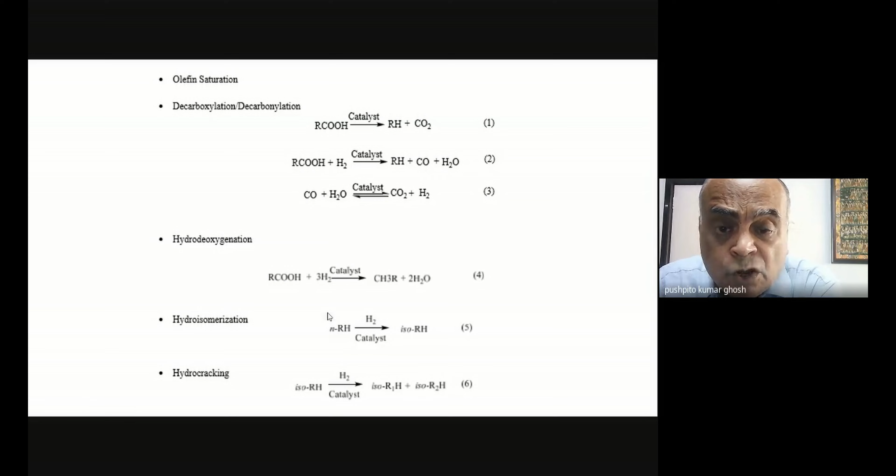What has also been found is that straight chain molecules like this tend to solidify more easily. For example, paraffin wax solidifies and you get a wax. But when you introduce a lot of side chains or branching, that same hydrocarbon will remain in liquid form at a much lower temperature.

So you have to introduce that kind of branching, and that is done through the process of hydroisomerization. Why do I need hydrogen? Because when introducing branches, I require hydrogen for that. That's where the hydrogen gets consumed, and also some of the olefins etc. you might want to saturate with hydrogen.

It could also be that if your chain length is too long, I have to crack it, meaning break it and make it smaller. This is known as hydrocracking. So I take this isomerized stuff and might want to split it into smaller molecules. Usually the smaller the molecule, the lower the freezing point, and this is the kind of structuring done to make this the fuel for this kind of application.

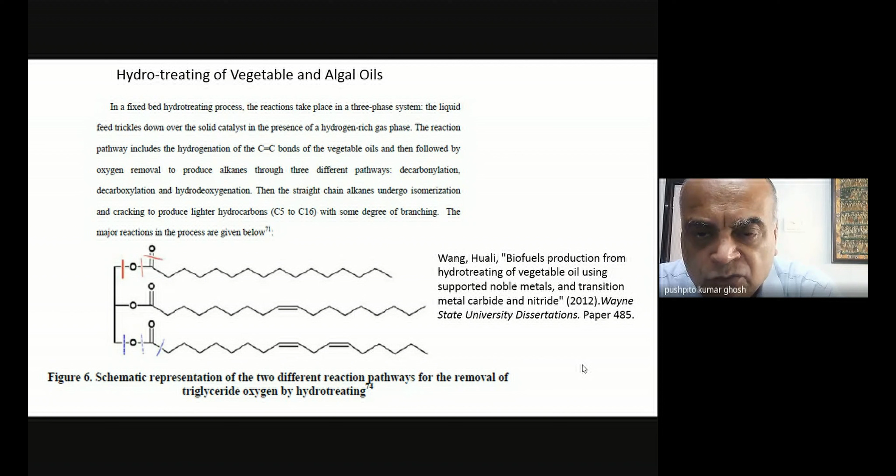So with that, we come to the end of biomass. We are through with biomass, and now the next few lectures will be on solar energy. What I'll do now is just introduce the subject, and we will continue with the next class on Thursday.

I've shown you before that the sunlight we receive on Earth is basically as if it's a black body of around 5,800 degrees Kelvin temperature radiating from the surface of the Sun. I showed you earlier the equation which determines the relative intensities at different wavelengths. I'll show you again next class, or you can look at your lecture notes.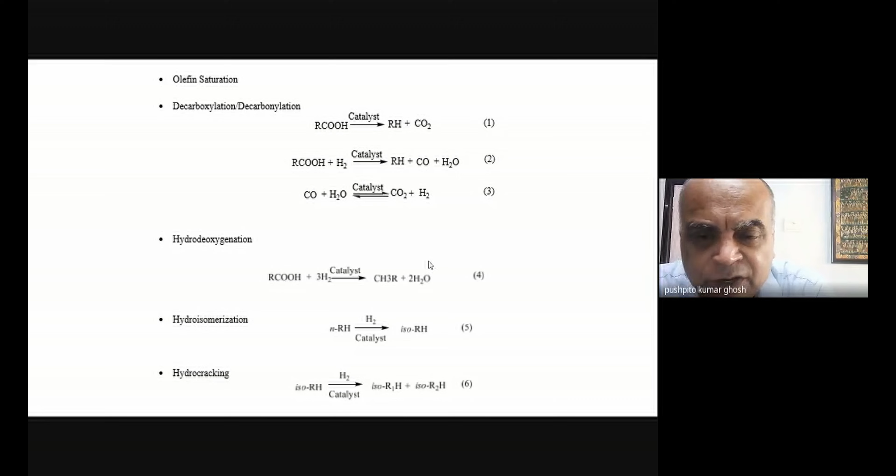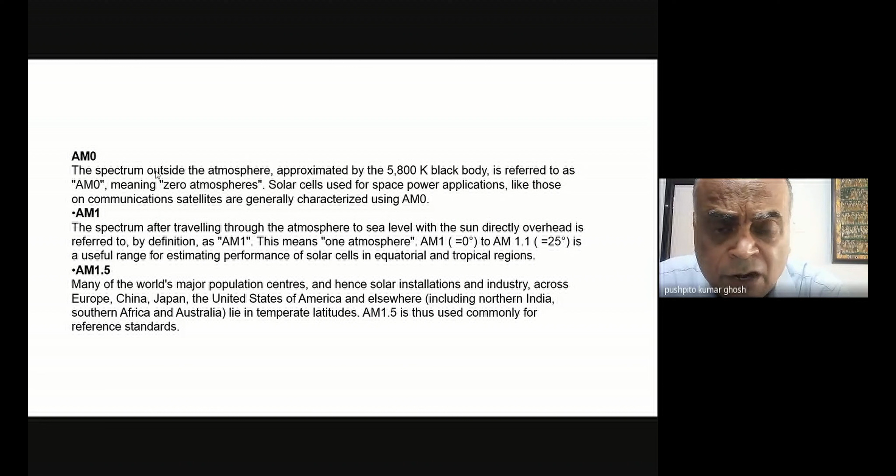So AM0, now let's look at these numbers. AM0 is the spectrum outside the atmosphere, approximated by a 5800 Kelvin black body. That is AM0. Where is it important? If you are buying a solar cell, you have to ask people, hey, tell me what is the AM0 specification or rating for the solar cell. Where is it important? In communication satellites, because they are in space, not in our atmosphere. So over there I have to consider this particular value, AM0, so you know what kind of radiation is available in space.

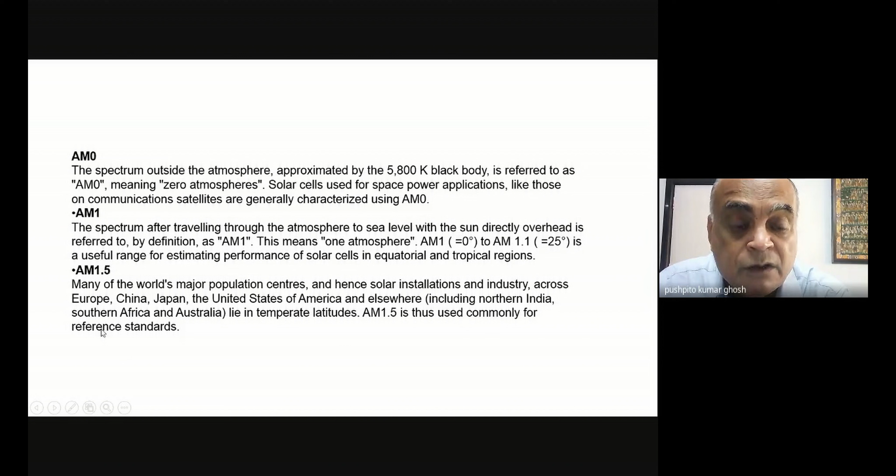AM1, the spectrum after traveling through the atmosphere to sea level with the sun directly overhead, is referred to as AM1 - in other words, when it is falling vertically from the zenith, that is AM1. And AM 1.5, as I told you, is basically at an angle. Typically AM 1.5 is important because many of the world's major population centers and hence solar installations and industry across Europe, China, Japan, the United States of America, and elsewhere, including northern India, southern Africa, and Australia, lie in temperate latitudes. AM 1.5 is thus used commonly for reference standards in these places.

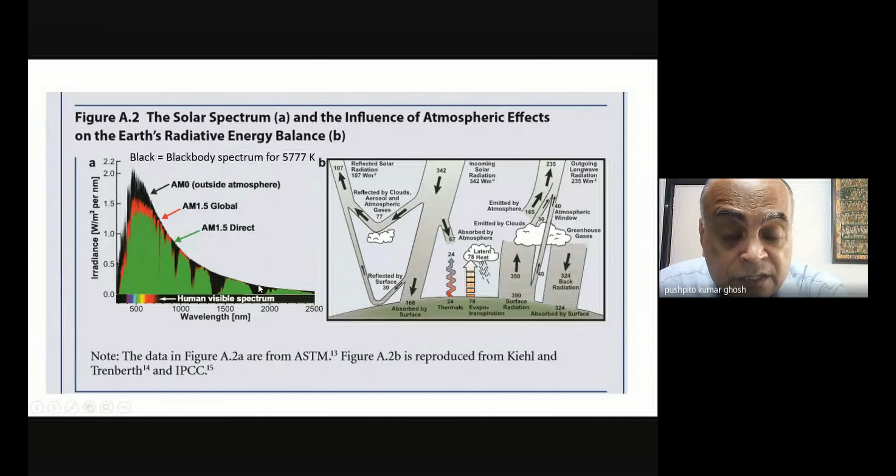So that is the relationship between the solar spectrum as you see it on Earth and at different places on Earth. You can see that these are quite different, all of these, and this is what you need to take into account. This is the radiation that we will be basing all our subsequent solar energy related lectures on.